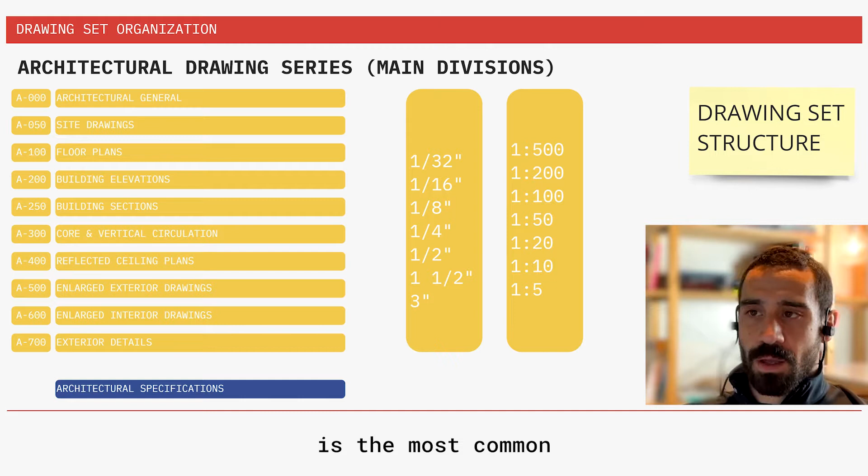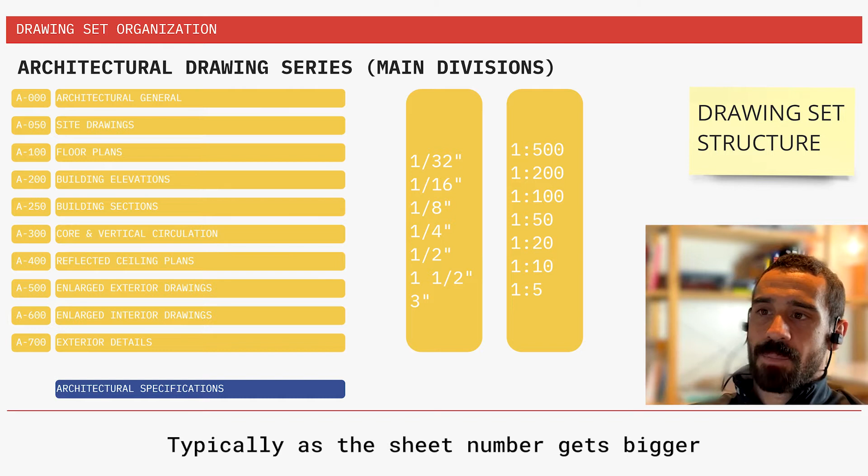There are many ways of organizing the drawing set. Grouping the sheet numbers into chapters is the most common way: 100 series, 200 series, 300 series, etc. This numbering system creates buckets of categories based on the content and the scale of drawings. Typically, as the sheet number gets bigger, so do the drawings themselves.

You want to put building plans into the 100 series, building elevations into the 200 series, and details into the 700 series, so on and so forth.

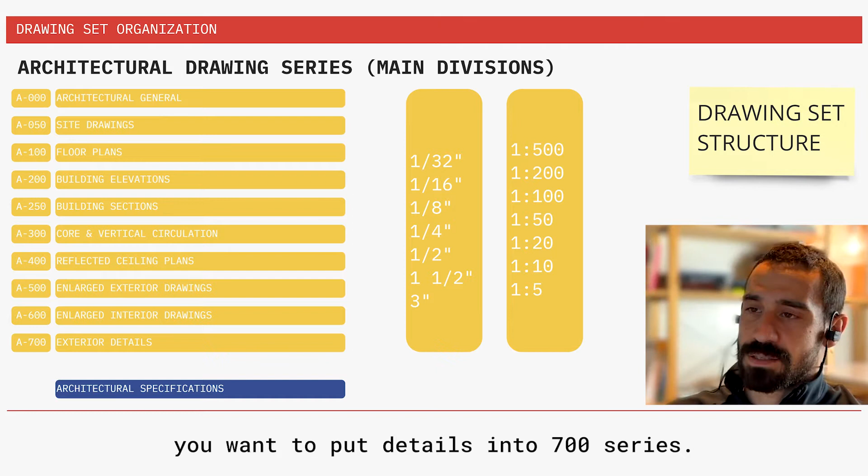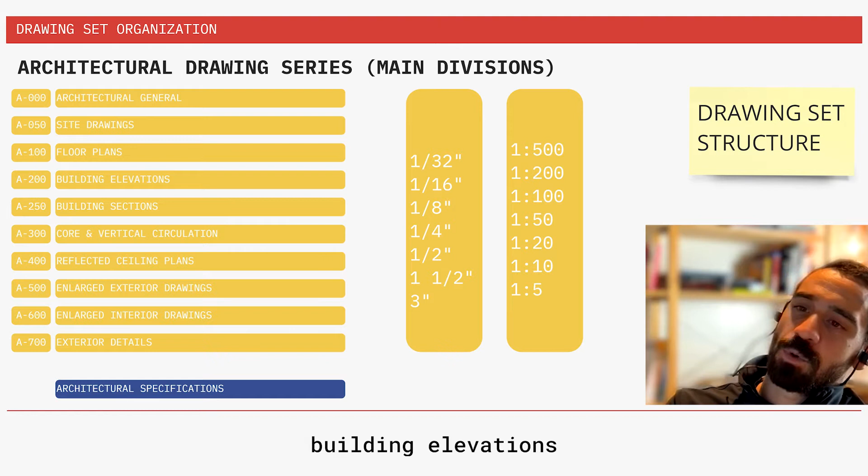But don't get caught up with the numbering system. Every office has its own that they follow, and it doesn't matter if you choose to use the 300 series for building elevations instead of the 200 series. What matters is carefully grouping the drawings based on the content and the scale of the drawings, based on the information and the level of detail they show.

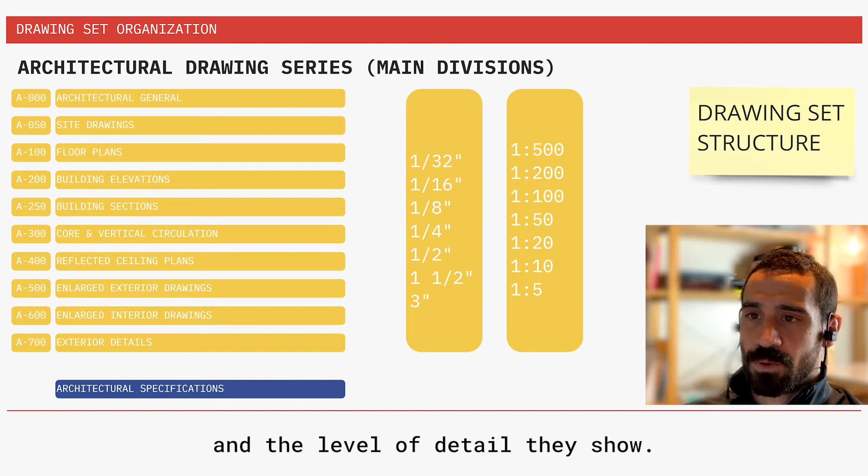So for the purpose of our discussion, we'll mainly focus on the 200, 250, 500, and 700 series, all of which we'll discuss more in detail.

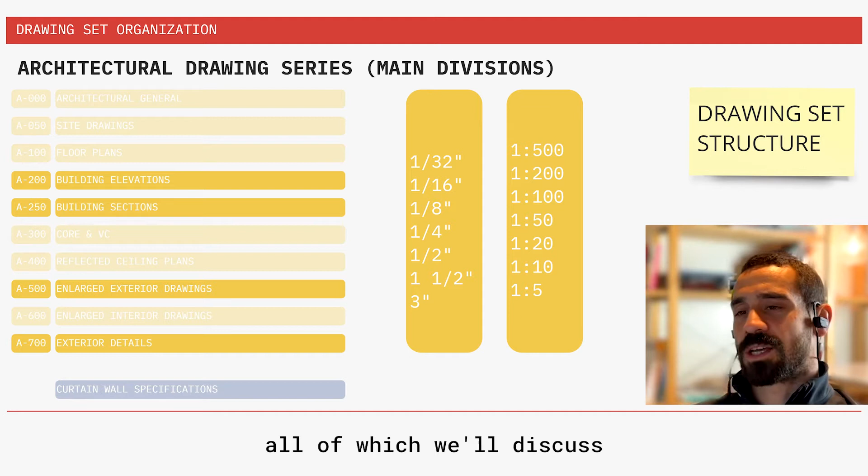Okay, basically, the name of the game we are playing is called Divide and Conquer. We take the entire building and break it down into smaller and smaller parts. I find it the best way to visualize this is to think about the building as a massive tree diagram, one big branch for each curtain wall type.

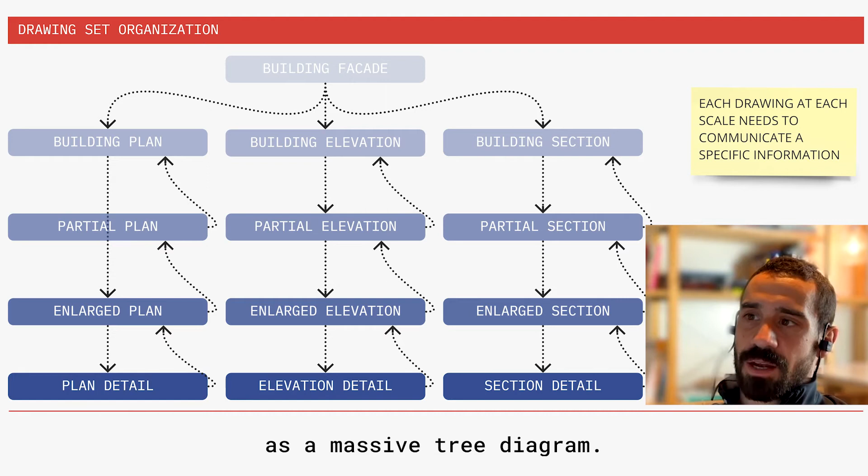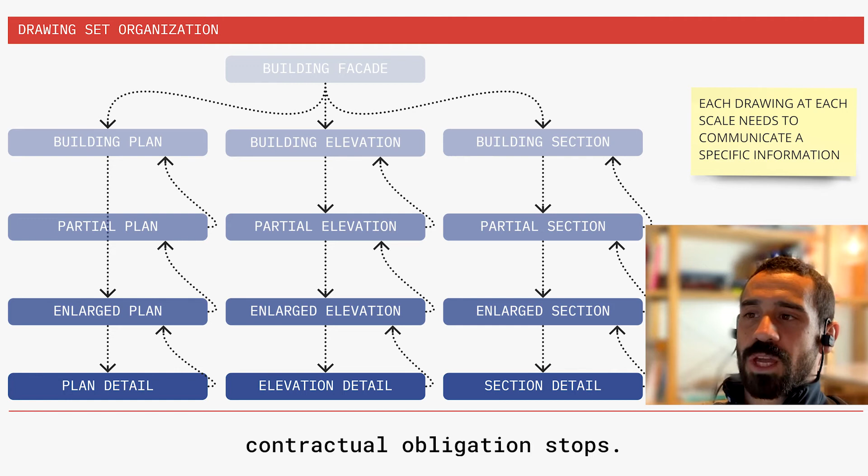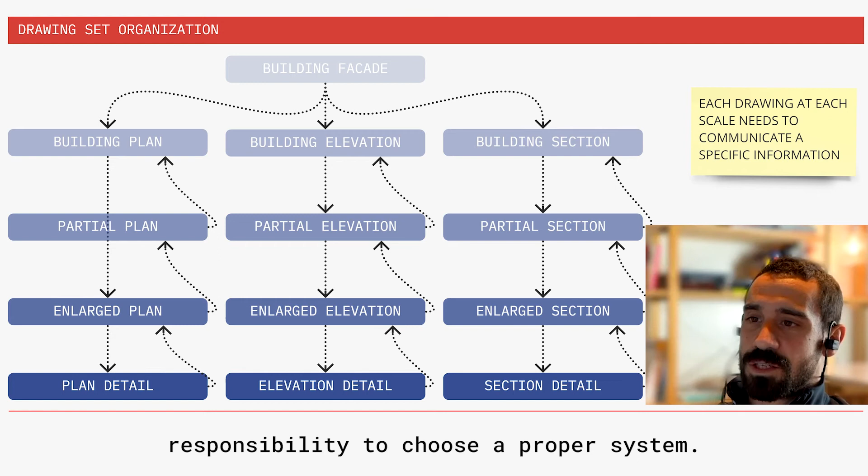At each level, we are communicating a different level of information. But there's also a point where the architect's contractual obligation stops. Contracts define these limits. For example, architects don't design the curtain wall anchors. Architects define how it should perform, but it is the contractor's responsibility to choose a proper system.

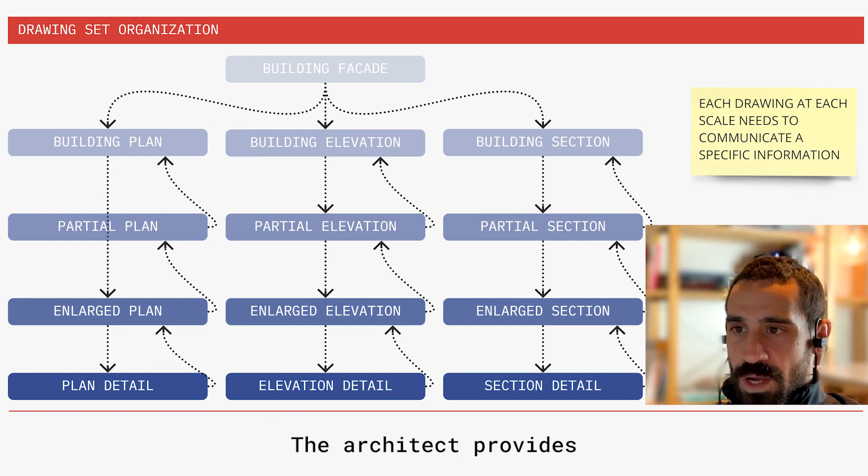So architects call their final set of drawings for construction, but it's a very misleading term. The architects provide the design intent, and the contractors decide on the means and methods. So the bottom line is curtain walls don't get built based on architects' drawings.

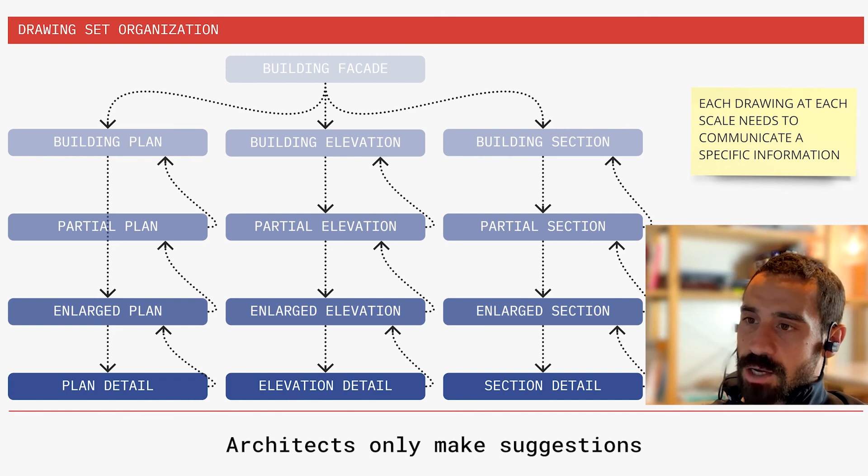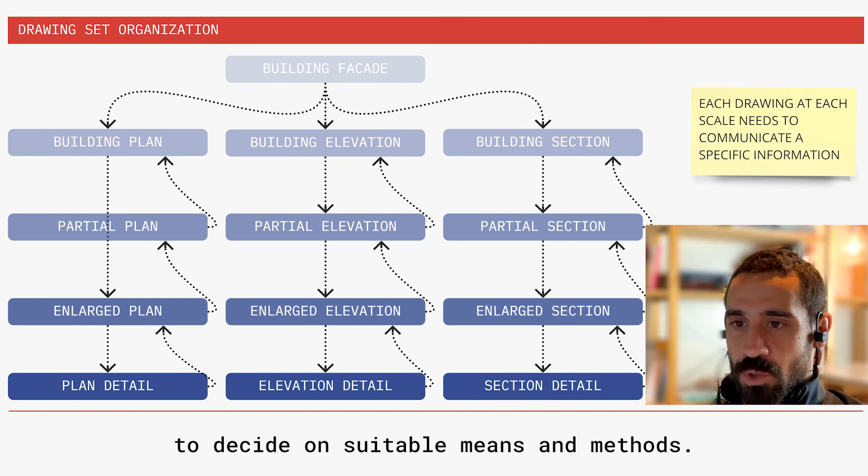Architects only make suggestions to achieve a certain aesthetic, to meet building code requirements, to meet project performance criteria. But it is ultimately the contractor's job to decide on the suitable means and methods. Recognize that this is a very important distinction.